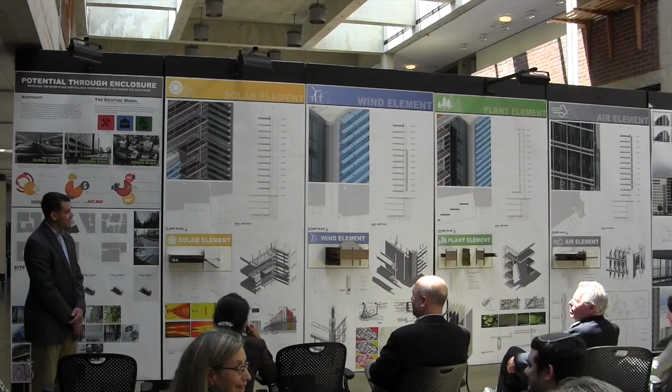My thesis focuses on the typical office building. The research question that I found myself asking was, how could I improve upon that model? And how could I take something that was working well and produce a better version of it for our urban environments? When I dove into this, I realized there were really 3 areas of opportunity.

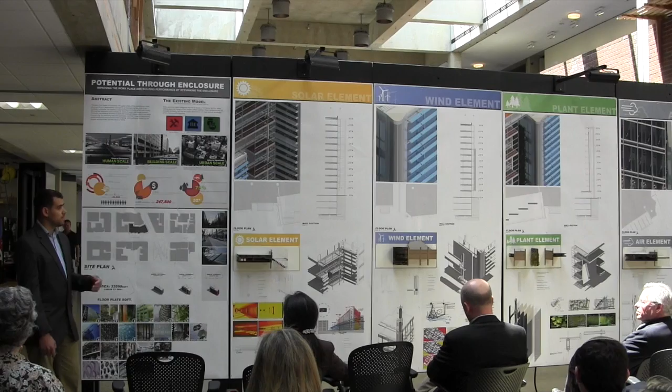There's an area of opportunity for improvement at the human scale, at the building scale, and at the urban scale. For the human scale, the aspect that came about was improving the work environment of the building. How do you create a better workplace using the enclosure of the building to do so? How do you focus in on that thin facade that you typically have now and turn it into a zone of something that becomes much more dynamic and beneficial to everybody inside the building?

It turns out that there are actually a few studies that cover the impact a healthy workplace can have on the employees of that space. John Burns, a medical doctor, put together a study and research article that helps facilities managers improve working conditions for typical office spaces. He found that a 15% drop in productivity could be attributed to whether the building was too hot or too cold, or the sun glare wasn't adequately controlled.

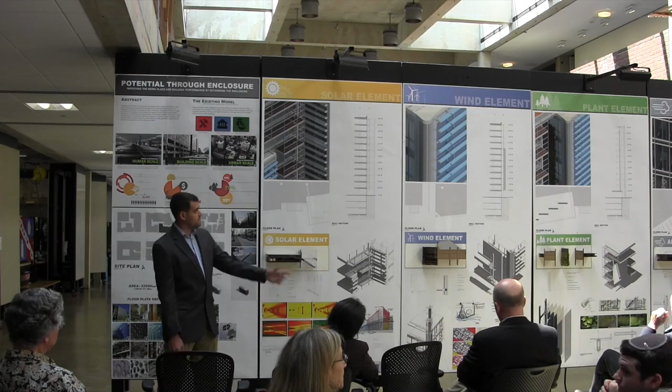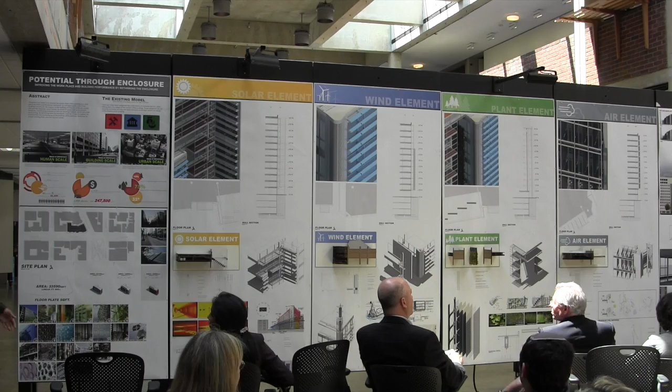How do you reduce the energy that the building uses? How do you produce energy with the building's enclosure? It's important to reduce the building's energy usage from a cost and environmental standpoint.

But leading into the urban scale, it's also important to think about how the building can become a better steward for the city. How do you take that and turn it into a production for the city? How do you put power back into the grid? How do you make it so the building is not just working for itself and improving that experience, but also improving the area and site around it through air filtration, water filtration, power generation, etc.

In studying these things, I approached 4 different elements or areas to focus my research and development on: a solar element dealing with controlling light and benefiting from the sun, a wind element which looked at capturing some of the wind currents along K Street, and a plant element and an air element that looked at reintroducing plant life, filtering storm runoff, and cleaning up the air quality and pollution in the city.

I picked an existing building. The site is K Street and Connecticut Avenue. The address is 1000 Connecticut Avenue. It's a pretty typical office building, 12 stories, for a law firm.

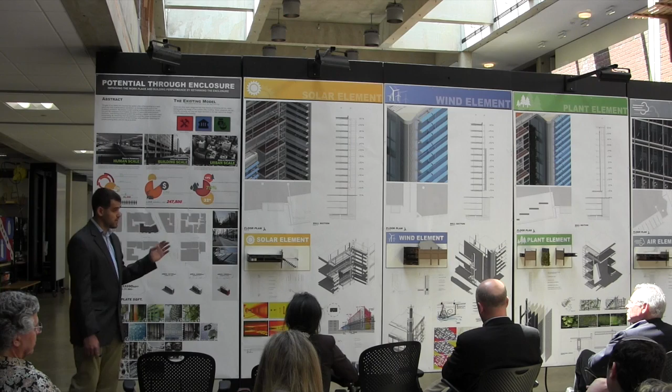It seems to be the perfect candidate for this test of renovating an existing building. I wanted to show that you could not just think about this in new construction, but really take the skin off of a building and start to look at it from there, retrofitting existing buildings, because that truly is, I believe, more sustainable than just building something new again.

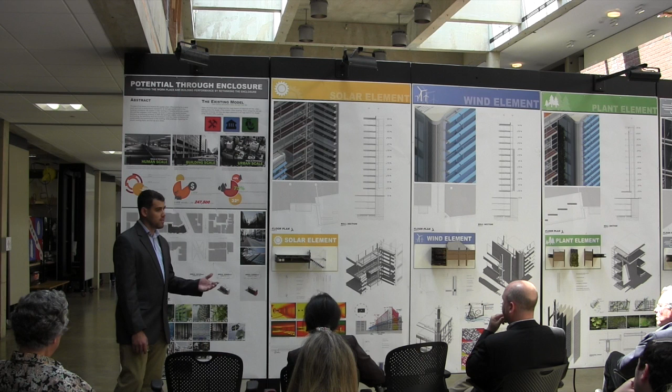I looked at what makes the building the way it is, the different factors, whether it's economics, developer, or city regulations. I also looked at a series of facades that did things like living walls and filtration systems. A lot of them did one particular aspect very well. They had a living element that was a showpiece, or they mitigated sunlight through automated systems and blocked the sun very well. But what a lot of these facades lacked was they didn't give anything back.

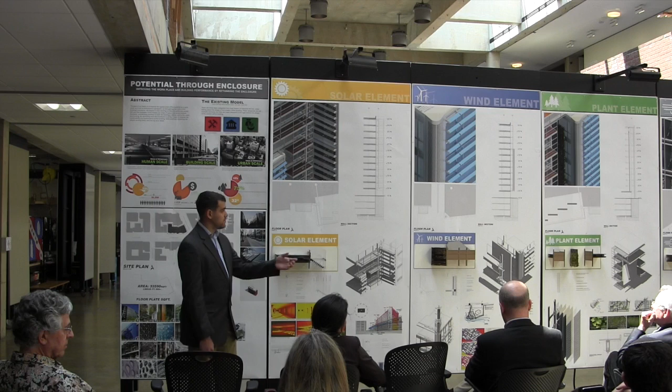So I'm hoping today to show you how it can be both ways, a relationship of protection for the occupants inside and giving back to the city. Again, there's the existing building on the site, a photograph of it now.

Here are some of the site images. You can see that I'm starting with this building and effectively renovating the exterior skin, the enclosure, so to speak. I start to make cuts and intrusions in the building to add this new material, and I've cut out some places to allow more light to penetrate and to insert these vertical living elements, which I'll go into detail on in a second. Here's a shot of those systems coming together, and then the final product.

You can see from the elevation these four categories or elements—I'll probably beat this to death, but basically we're looking at solar, wind, plant, and air. For solar, it became about how to shelter the occupants better from the southern glare of the building, which was a particularly harsh condition.

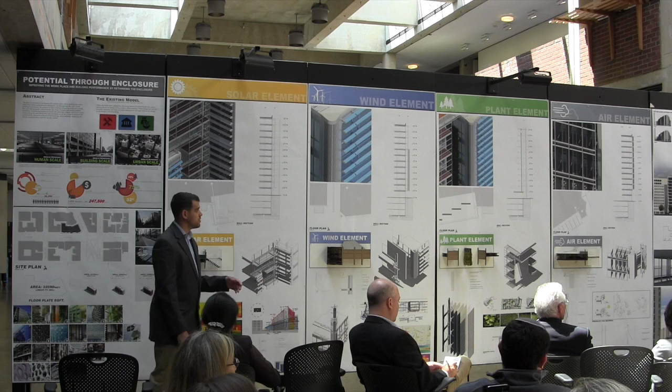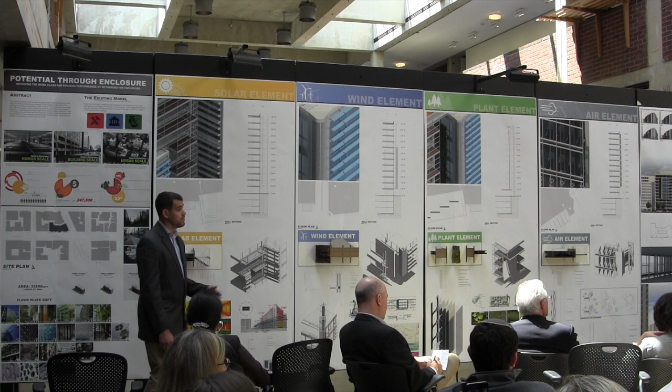I used programs like Vasari and Ecotect to study this and optimize the louvers to a point. But it also became about how to get natural light deeper into the slab. Because of the rigid floor-to-floor heights we experience in DC with concrete construction, I looked at systems like fiber optics, which help bounce light deeper into the building and can be used in smaller applications, such as schools and single-story buildings.

I looked at the louver systems in more depth—these are a fully automated system controlled by the building, but also by users in the space. Community spaces, conference rooms, and other breakout areas have louvers that give control back to employees, so they can choose to shut out more light or let more in based on their feeling. But it's also driven by the building, so at the end of the day these reset and perform based on the location of the sun.

I actually went through and designed some of the details for how these louver motors work and how the two different gear interchanges work.

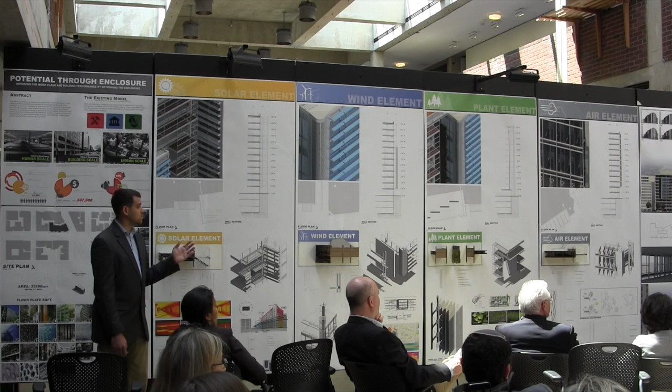Here are some of the site studies—existing conditions on the left, winter conditions on the lower part, and improvements on the right. As you go throughout the day, particularly in winter, these conditions are almost intolerable. Yellow is bad, greens and blues are good, and you can see how that transitions through the day. Eventually, through tweaking these programs, I was able to make an improvement for a more even, diffuse flow of light. If I had more time, I'd probably be able to make an even larger impact.

You can see from this section the fiber optic system I was talking about, with that light-catch element right there, which in detail looks like this. These mount to the exterior of the building and allow light to flow back deep into the slab.

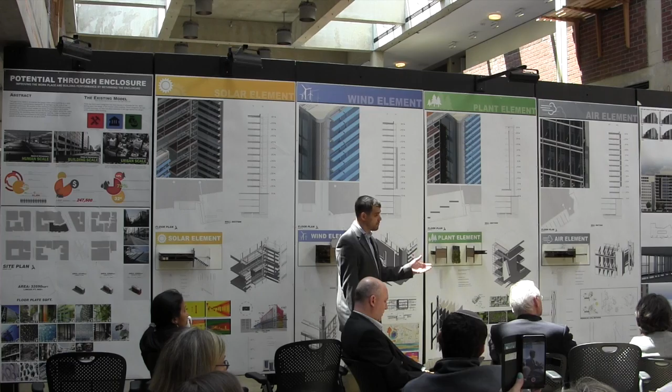This is a hybrid system worked in with artificial LED lighting, so that when the day is not as bright or the ambient light is lower, the LEDs step up and keep a consistent, even lumen count for the entire workspace. But on really sunny days, we're using less lighting and less power, which is better for the building from a performance standpoint, and the natural light is all around nicer for working.

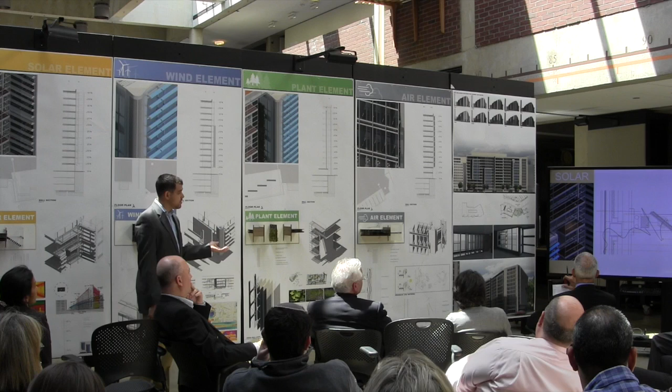Here's a detail of how that sort of system breaks down. Although the louvers are fixed, they do have a slight rotational mechanism that allows them to track winter and summer sun paths to gain the optimum efficiency, the average being 38 degrees for the DC area.

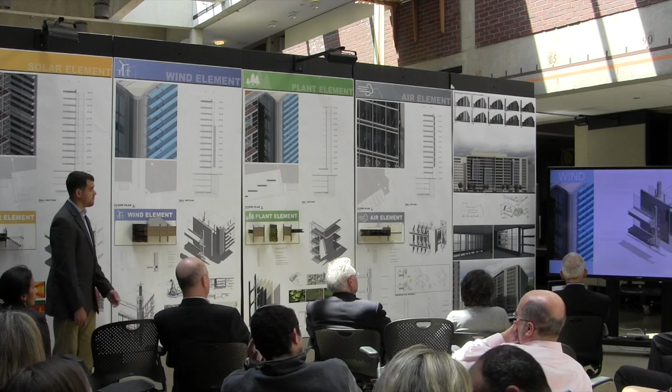Moving on to wind, you have the vertical turbine elements, which I developed to take advantage of those currents that bucket along K Street. You can see some of the initial urban and close-up wind tunnel studies I used to look at the existing conditions there.

While this is not a huge generator of power, it does capture some unrealized potential along the facade. There's an axonometric breakdown of how the system works: basically long shafts protected by this vent system, and these shafts are tapped into an alternator-like generator that allows for production of power.

So from the plant element, not as complicated as some of the others, admittedly, but it does bring life into the workplace. Plants, for example, have proven to help regulate air quality in work environments. They keep the air at a nicer humidity so it doesn't dry out, and they also help increase productivity according to John Burr's survey and study.

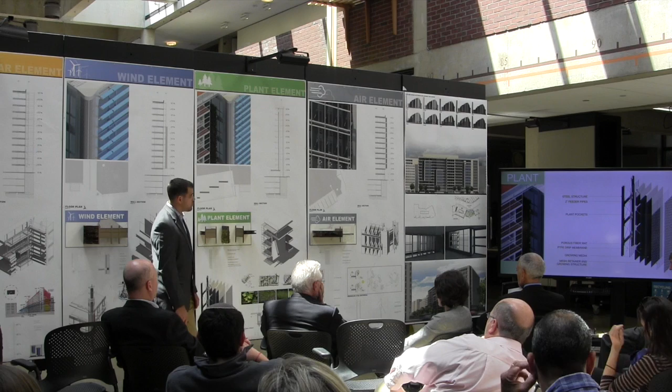The systems are not just for looks, however; they also filter stormwater runoff from the building. They use a specific set of plants, in this case English ivy and several other grasses, that pull all the organic compounds out of the rainwater as it filters down and feeds the system as it drips.

The idea is that once the leftover excess water permeates the bottom of the living wall, or vertical bioswale, it then goes back into the city's sewers cleaner than when it started as the acidic rain and polluted water coming down from the sky.

These are held in with a basic structural system with trusses that then tie back into the existing column structure of the building. Again, I was trying to present a realistic scenario that was a renovation that was doable versus something that was over the top.

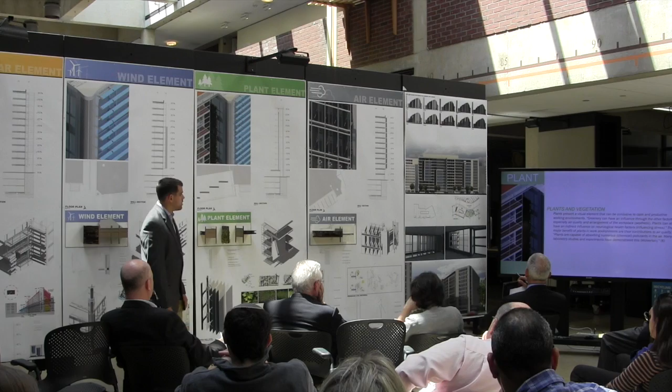So moving on to the last category, we have air, and this is one that I particularly enjoy. For me, air was more about regulating the quality and type of space, so I'm using ProSolve 370E, which is basically a titanium dioxide-heavy, nanoparticle coating that pulls smog and other pollutants out of the air via a catalytic reaction with the sun.

So you can see there what the system overall looks like, and then when we zoom in, you'll see that the shading devices have these thousands of perforations, and that's to help increase the surface area so the coating has the maximum amount of area that can work.

And then there's some of this data. This was developed by two students in Germany, an architectural firm, and they put it to use in a hospital in Mexico City in this format, and that's why I'm showing you those particular panel pieces. I wouldn't necessarily use their particular abstract form, but the material coating itself is still applicable to this project.

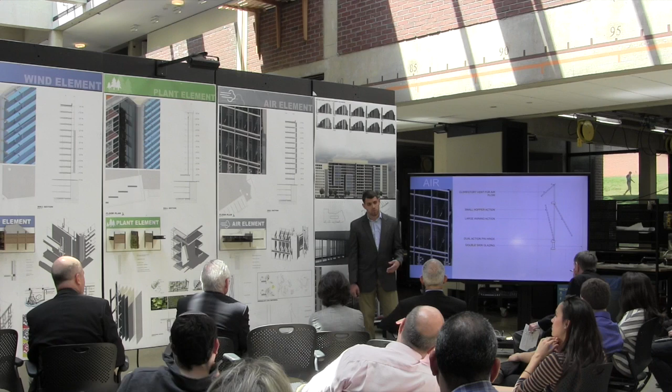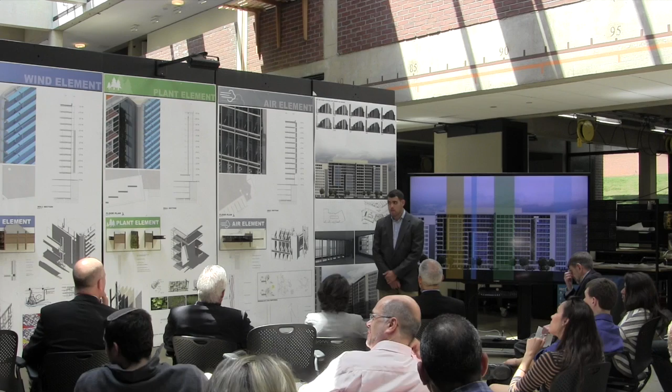Yes, I do think there's potential, and I actually did a number of studies that show the various areas for different placement options.

So I looked at where the wind flows were, and where the sunlight hit the most. You can see in the shadow studies that in winter and summer the top portion of the southern facade receives a lot more energy year-round, and the northeast surprisingly receives a lot of winter light that I hadn't anticipated before. Using those diagrams, I started to think about what drove that placement.

As far as combining them, I thought about how to integrate the systems overall with the skin, but not necessarily taking it to the next step. I suppose you could apply the coating, for example, to the louver systems that are forming this sort of double skin on the building, to help reduce some issues.

How did you assess that they would in fact contribute to the grid, rather than just meeting their own goals? I think your premise at the beginning was that they should be able to contribute back, give more energy, have excess energy savings that come through.

While I didn't break down the solar studies to the photovoltaic studies to that sort of energy output benefit, it was my assumption that at peak hours the building would be able to put some power back into the grid, and that during off-peak hours the city would provide. So it's sort of a give and take.

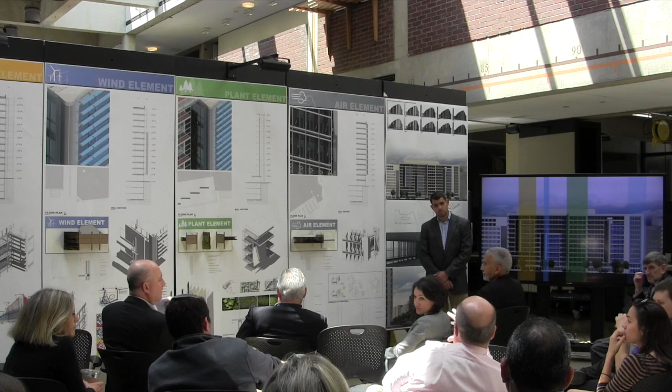I think this is a very interesting way to structure a thesis, particularly stepping into a building that already exists and thinking about the project of reskinning. I hope it shakes people up back there, thinking about this being a little different from what we usually see as a thesis, and I think it's good in its difference.

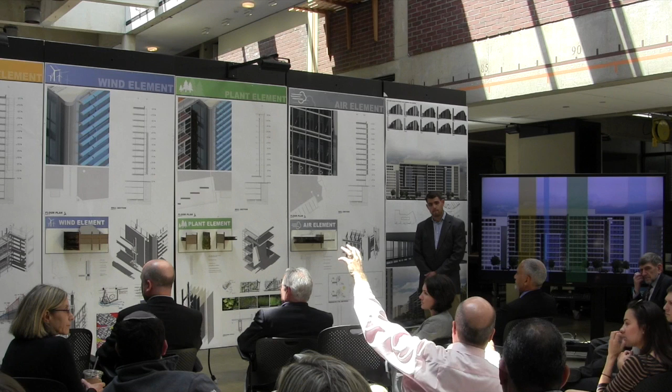At the beginning you talked about the human scale, the building scale, and the urban scale. Maybe I just got lost at one point, but it seems that most of these propositions are about the building scale. I'm left wondering, what is the contribution at the human scale, and what is the contribution at the urban scale? You may have said those are important things, and I'm just going to put them aside and look at the building scale, because my hearing isn't totally fantastic.

Well, the contribution at the human scale is the better work environment, a healthier workplace, with better lighting conditions, control over shading and natural ventilation. I can see that as being the implication of this, yeah.

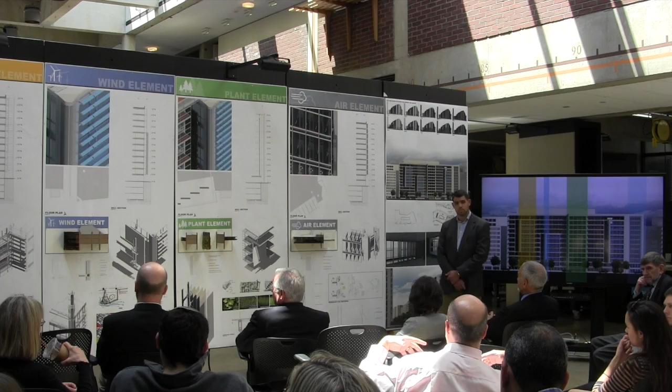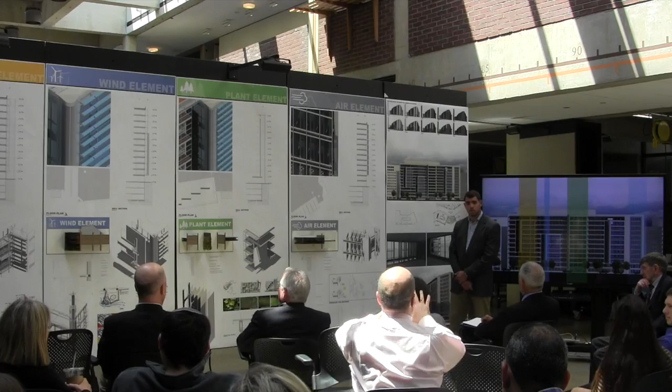But what I'm looking for is kind of proof of the pudding, the interior views that are the gestalt of all of this. While there are a couple of interior views there, they're cropped, and those are really about the skin. Those views aren't really about the changes to the work environment that come through.

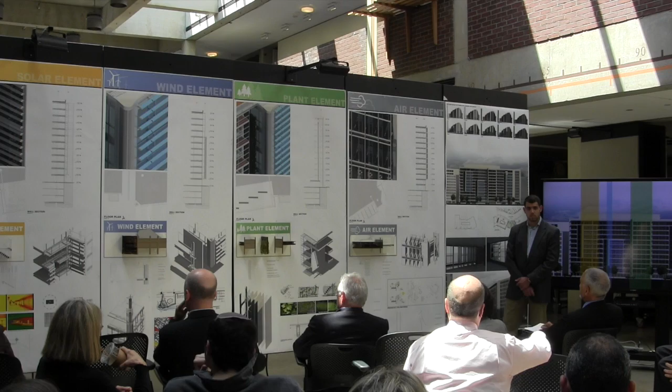It seems to me you've done a very nice, analytical study about moments that take place on the vertical surface of the building. This building was recently built and has a fairly boring skin to it, and that's what I'd say—it's a much more animated skin that you've created. That's probably much to your success in it.

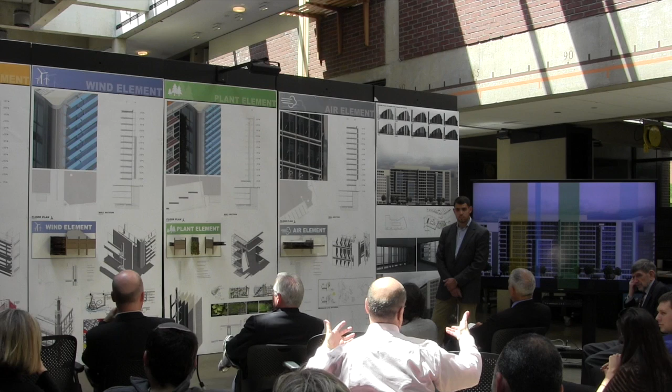But I have less of a sense, either urbanistically, as to what the value added is there. And I have less of a sense—I would think there'd be a more robust depiction of the quality of light, of the kind of space that's inside here. Something akin to the image you showed of the NPR offices.

From an urban standpoint, the implication is that by taking this building and applying this sort of design approach to an urban scale, you can improve the quality of the city's air and water and other aspects on a massive scale, starting with one small single building block. But at the same time, looking at...

Could I improve the immediate surrounding environment using these coatings or the way I filtered the water? So from an urban standpoint, it's about taking that building and not just stopping at, okay, the building does a really good job of regulating its own energy usage.

Now what can I do to help produce a better quality environment for the city around it? And that's sort of the urban idea from this.

The other one is I'm still trying to understand the wind. How many days in DC do we have wind which we can potentially use? And how far will the wind spread? Or is it just that we're talking about more comfort inside, or are you talking about using this wind inside the mechanical system?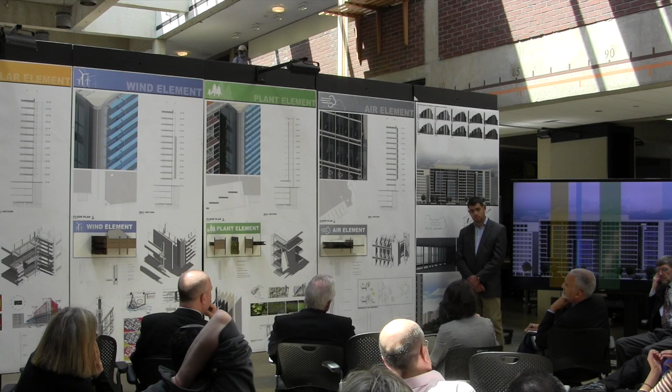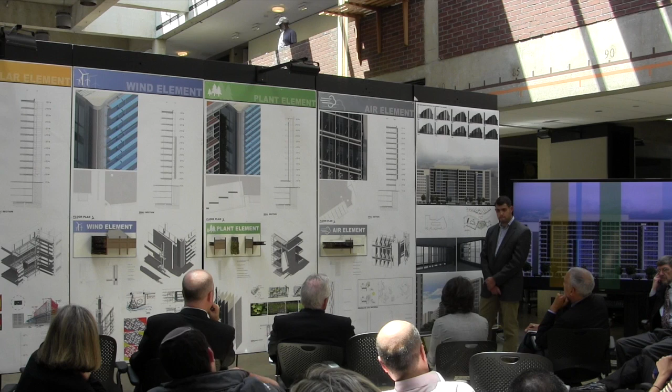But the other approach would be to say, here I'm being really opportunistic about the entire city—maybe not even just one building—about how the objects of the city, or the infrastructure of the city, or buildings under construction, might be the perfect opportunity to make an insertion. I think in that sense it might take some of your ideas and tie them to a particular standard of construction that, in DC in particular, is governed by a lot of influences that give it a kind of grain you can count on, like the floor-to-ceiling height and concrete. But maybe there are other things, like light bulbs, posts, or other infrastructures of the city you can think about.

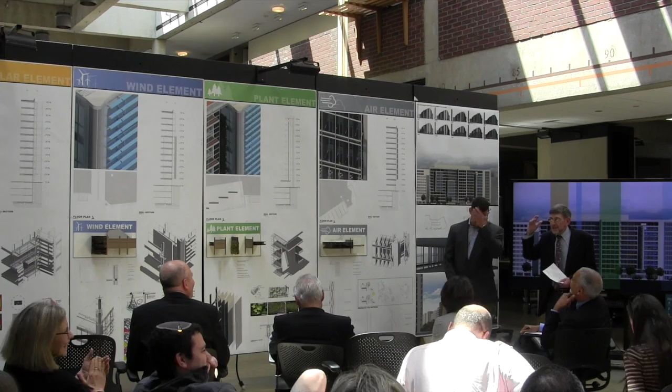This is, to me, a very... wait, hold on, Richard, come on. This guy is... so as a kid and as a parent, I was a reader of Winnie the Pooh, right? This is the Tigger. This guy's energy level and his willingness to tackle the biggest problem is just absolutely astounding.

So the reason I thought of this is because he's been doing what you're talking about. In other words, he started this thing with this outrageous statement: we've got this city, all these facades are boring as hell. What were these people doing? They all look the same, et cetera, et cetera. They're not doing anything positive. And meanwhile, there's all these guys running around ripping all the old facades off and putting new facades up, and it's not really making any significant difference—and I can do better. We can do better. This is where he started, right?

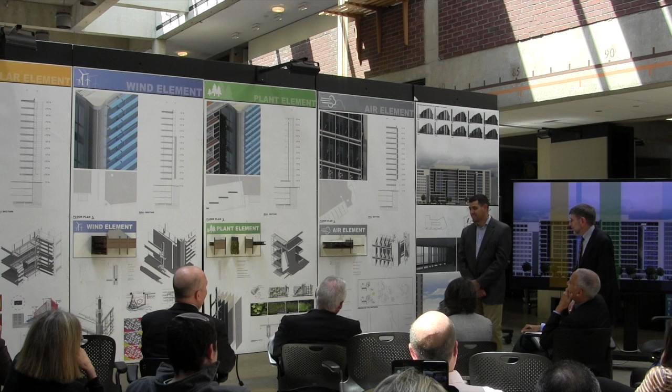Okay, come on. So all he's doing—this is just one example of what could happen in the whole city—was his idea, right, that he's not telling you about, because apparently we beat him up so much that he's being too... just the imagery, polite and whatever. So, come on, Richard. Richard. You're bouncing up and down.

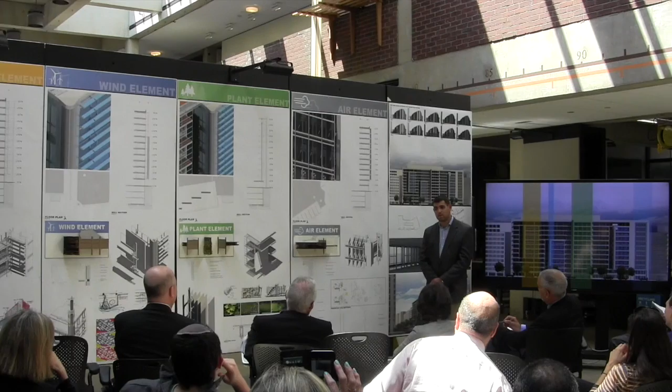I saw this project as a way to open the doors to a discussion about making an area that has a lot of potential live up to that potential. How do you take something that you keep pushing with this thin flat facade and make it something that actually earns its keep in the built environment?

We love to talk about sustainability from the standpoint of putting these lovely green roofs on buildings, whether they're intensive or extensive. We talk about how many gallons of stormwater we can collect in those, but what's stopping us from then applying that to the vertical surfaces of these buildings—particularly an office building, where I know there are a lot of very nice office buildings out there designed for clients specifically, with very large budgets, so they get the nicest finishes.

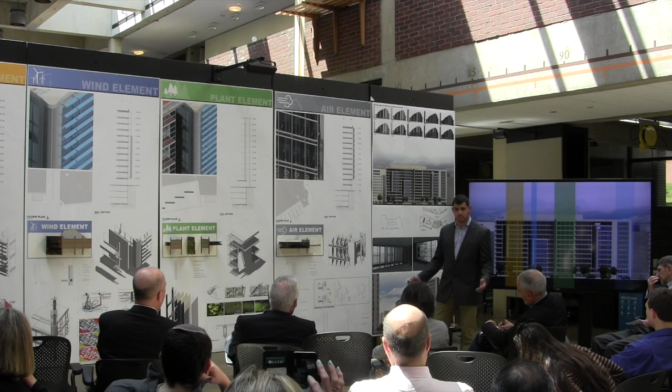But even those nice buildings don't have any sort of give-back to the urban environment that they're in. So that was the whole point from an urban perspective—how do you start that discussion about creating these buildings that actually put some stuff back in.

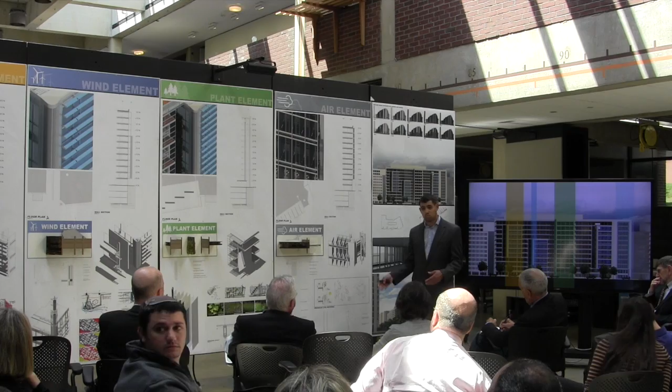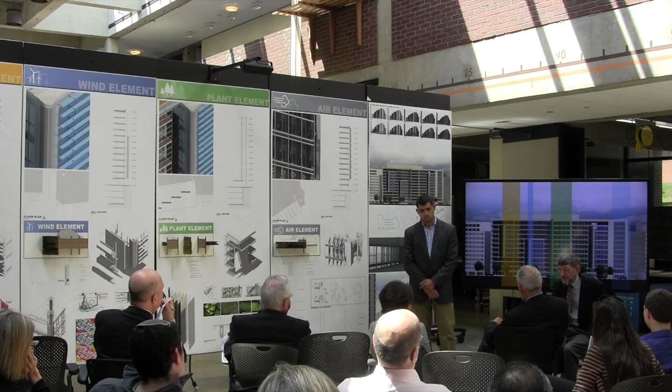Even if it doesn't work perfectly, I'm not saying I have all the solutions or that I've solved net zero buildings. But by doing this, we're doing a lot more for the city and the building than just putting up this year's most efficient glass panels. Washington DC, with its 10-story building height, is a pretty perfect place to do this because there are predictable wind patterns that won't change if someone builds a 30-story building nearby. So DC is a more stable environment to do this than Baltimore.

Friendly amendment on the windmill thing—take that cover off and show the vertical axis windmills there so people can see them spinning around in the wind.

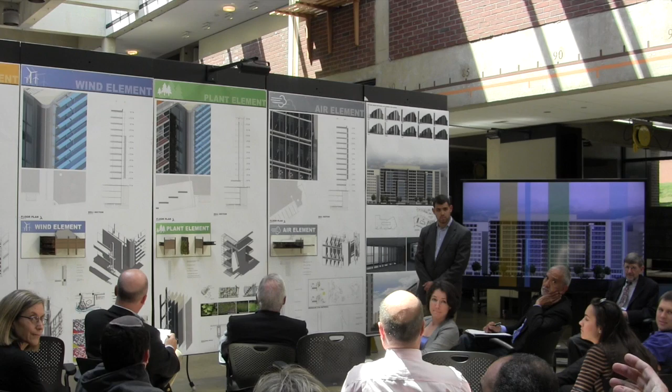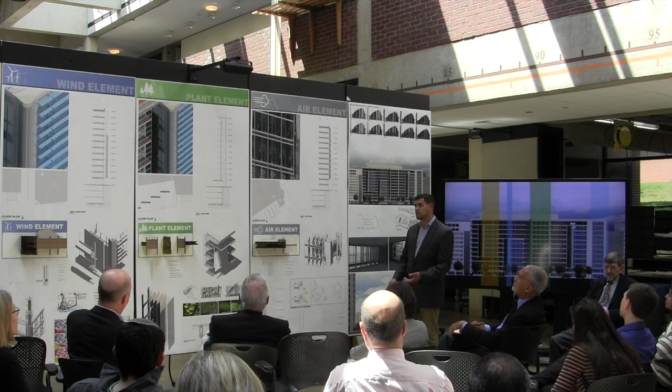Part of this is that it's not meant to just be a demonstration model showing something spinning on the roof making energy. I questioned that too, and the answer was that it's more efficient to have it contained so debris doesn't get on the blades. We designed the system to work on this vertical surface because of the height requirements we talked about.

I'm not saying I have all the answers, but I'd like to think that if we invested in this model a bit more than the economics-based model—where it's about maxing out rentable area to charge tenants as much as possible—if you're willing to sacrifice a few hundred square feet, even in this case I was able to increase the linear footage of the perimeter wall, which increases the value somewhat. Using this as a selling point for renters while also improving the space internally and externally was really what I was arguing—that we shouldn't be using these glass facades.

Richard, based on the enthusiasm, and I agree with you in terms of the ideology of it all, I'm with you. I don't think anybody in this room is here to say no to you about that. So I guess the question is, you make a claim that the building is better as a facade.

I walk past this twice a month going to my allergist this time of year. I'm looking at something that would certainly capture my attention far more than what's there now. So the thing I want to know is—is there a way to show imagery like a before and after, showing this building all bulked up and contributing to the urban streetscape? Is there a possibility of having some measure, let's say of the wind turbine, going back to how many days a year it can be productive, or even just the productivity on a good day? What's the ballpark estimate?

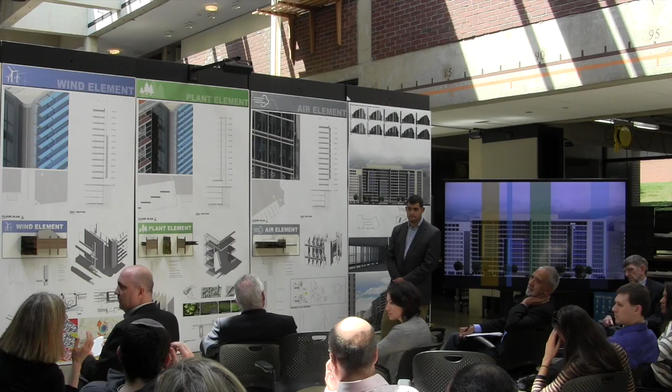I'd like to point out one of what I think are the triumphs of this: you've studied and picked out the actual material and assembly implications of your sustainable strategies, and you've taken the physical reality of a DC office building in a fairly generic sense. This could apply to so many buildings, and you've really looked at what it means in terms of what the parts are, how the parts join to the building. I think you've taken this project farther than we often see in a thesis, and that's an important aspect of what you're doing.

So, yes, you haven't quantified it all for us, but you have used the software to run some tests, and I think this is an exemplary project in the variety of ways you have dug in and tackled these sustainability strategies.

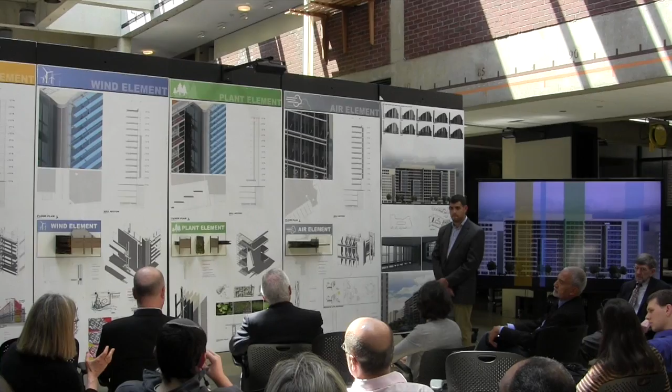So I think you've really gone beyond greenwashing here, and then you've looked at, okay, what are the real implications? How's it going to change the office building—not just in terms of renderings. Yes, you could have shown us the inside, you could have shown it from the kind of street level view of the city, and I know you wanted to get there because you had enormous ideas.

But I think it's important to point out that what you really have done well is you've taken us right into that facade. You're not just looking at it as a wall, but including your drawings, you delighted in the pieces and how they come together and make these dynamic aspects really functional. That's something else you could have shown us that would be interesting—rather than a static, thin facade, you've given us one that's responsive, that actually operates.

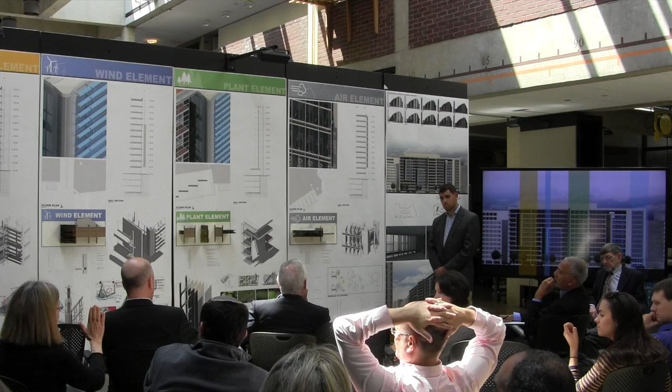And you've also, I think, underplayed the way in which you've proposed an architecture in which you can't build the same facade on every side of the building, that you would produce an urban area in which we felt oriented in the environment because of the way each facade worked in tune with the sun, the wind. We would see which sides plant life could grow on, which sides it couldn't, where it's possible to generate wind. We would become, I think, more aware of the environment because of this type of architecture that you've explored for us.

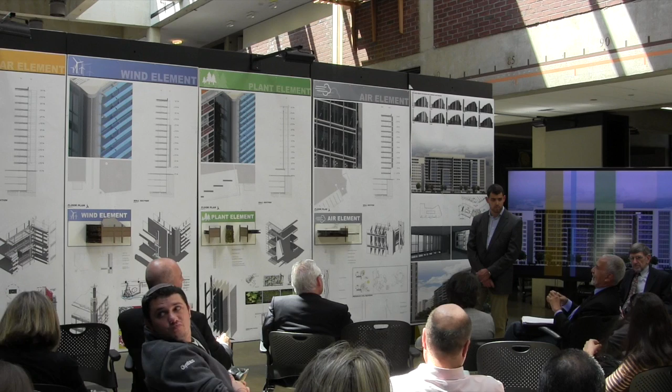...almost suggests that these systems might have been a better test on a building where you controlled the orientation and placement, and had to respond to other conditions. You're lucky, this has a southern exposure, so you've set the parameters under which you would explore, but some buildings have other exposures as well, and they'd have different solutions.

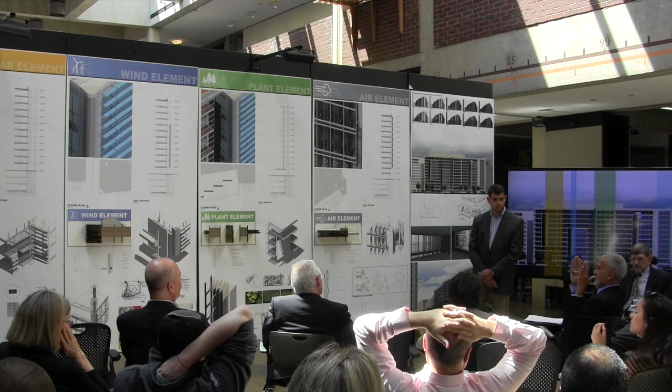The interesting thing about the building in Baltimore is that it uses double glazed walls, sometimes a foot and a half apart between the two planes, and then other things to respond to the orientation. I'd suggest a test could be done in a number of ways. The fact that you limited the test by taking an existing building causes us to look at it a certain way, versus if you had a building and your solutions responded to all of the building's conditions, including its roof.

So if we elaborate on the strategy, at one level what he's got here is a process applicable across the city of Washington, D.C. One can imagine - he did detailed wind studies of what happens on the street. If I remember correctly, had he been doing the building on the opposite side of the street, the wind velocities wouldn't have been great enough to drive this turbine.

Right, so in that sense it's place specific. But what that also means is that if you do the wind tunnel study for the entire office district of Washington, D.C., then you know where the wind velocities are strong enough to drive these turbines, and it tells you where you might go about encouraging people to do the kind of thing Antonio was mentioning - you figure out what the incentive system is.

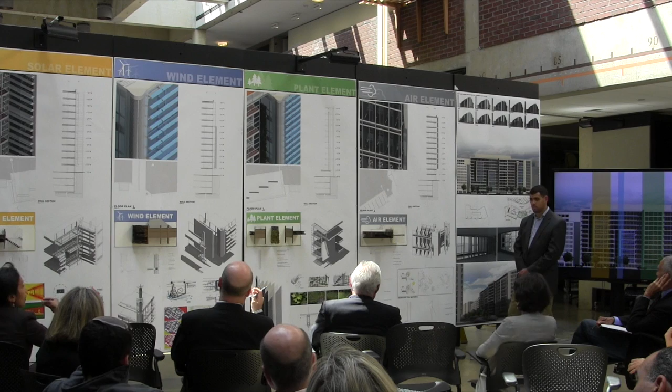Something to quantify your research rather than just pictures - this will help you get the sun's depth, 12 feet. And if I have a conference room there and I don't need 12 feet of sun on my face, I know I can't do that. So any little thing to add more value to that room, the time you spend, so that you can make an informed decision for your business.

So moving forward, maybe take a few minutes and write notes for yourself, because as you get into the career, you can use this information.

I think Antonio touched on a point that might suggest where the future of your thesis might go. Right now, Exelon Corporation, which has bought all of Baltimore Gas and Electric, is now trying to buy all of your Pepco stuff. They're building a new headquarters building in Baltimore with a skin that does nothing. When they came before our design review committee, we challenged them: why does their building have no response to energy issues if they're an energy company?

I don't think it's the developer or the city who would give this benefit. I think it's the energy company that should be buying the energy that's being saved here. The energy companies would be the partner in the skin, looking at the potential of the skin, how you deal with it, how you finance it, and how you gain from it, because nobody's going to invest in it unless they gain something.

Absolutely. But Gary, I'd like to say I think it's the owner of the building, I think it's the energy company, and I think it's the city, in partnership.

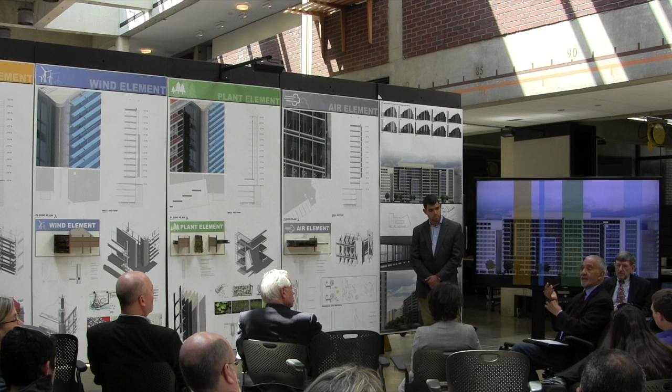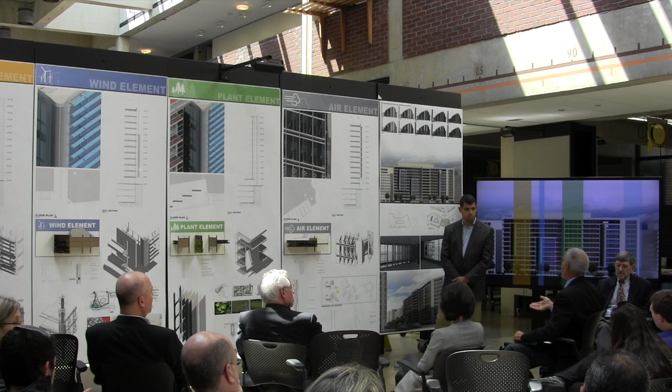It gets back to the question raised earlier about how many different levels you look at this urbanistically, as a pedestrian walking along the bottom of the building with things dripping on your head from overhead. So what do you do in the design of this to create a full building and not just a building skin? I think some of us cringe at just reskinning a building rather than rethinking it on all of its levels.

I think you could have solved some of the scalar issues here by thinking about how the ground plane of the building works, what people see when they're walking down the sidewalk and so on. The window plane is generally about maybe 3 stories, and how is that scale different than what happens above that?

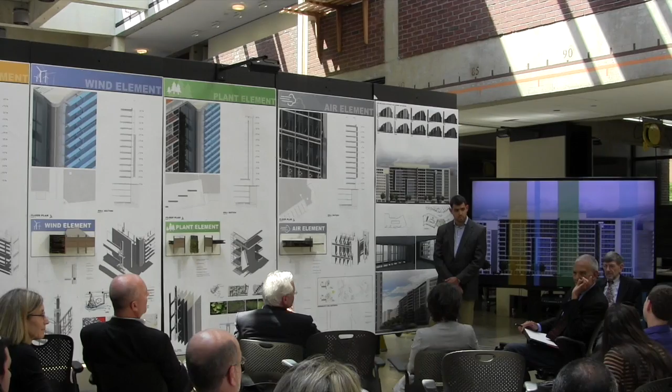That would have introduced a discussion about landscaping on the streets, a question about cover and shade, a question about how you differentiate the office from the retail below. And you have an opportunity by adding this skin to deal with the entire building and its environment, not just the skin. And maybe the answer is that there's a different skin at a lower level than at another.

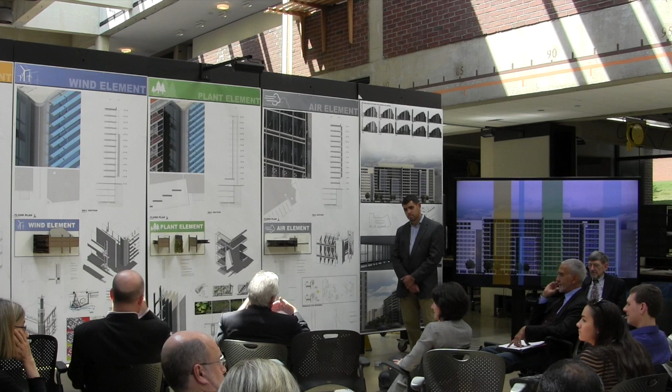If you can get the facade to work on a more regular basis, think about how you can introduce water and rain capture into this, how you can use the stack effect to capture that with a heat recovery wheel, and really think about this as a living facade. This gets back to process. I think thinking about these as individual things and not as a whole system is where I would encourage you to take the next step.

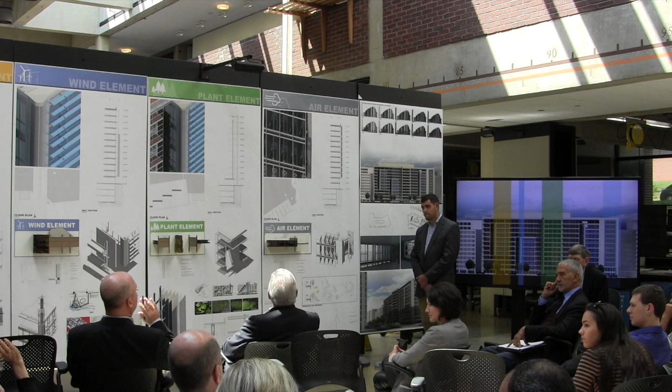There's another aspect that I'm going to go out on a limb about. I think that a lot of these things in the future, maybe not so much now, this is going to be dated. People are going to say, these people were doing this back in 2020, whatever. Why? It's the same thing as when airbags showed up in cars.

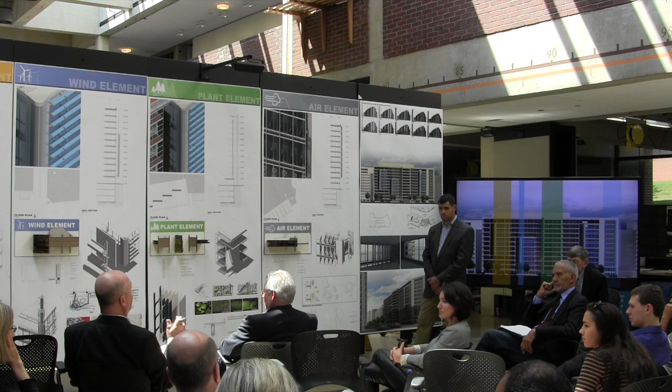The car companies would boast them, airbags. Now they're standard, and they're hiding them, but they're there, they're functioning, and thank God they're saving lives, right?

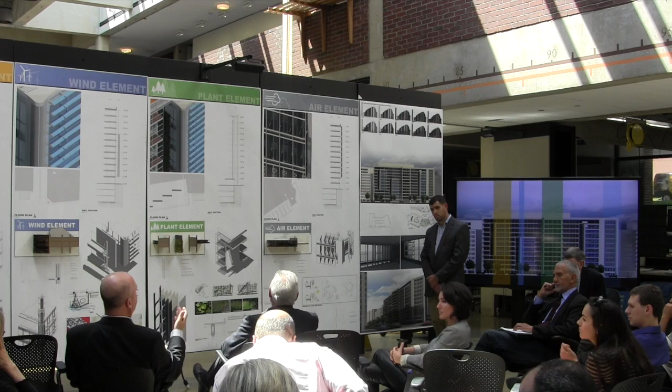I think the green features are more and more becoming code and more becoming part of daily life. And I think one thing that doesn't change is you're an architect. These things, to me, are means to an end, and I think eventually I want to see a building. If the facade is working, it's awesome. But do I really need to see things all the time? Do I really need to know it's there and it's green and it's leaking and it's doing it? No. I want to look at a building and think it's more sustainable, more financially interesting, and more attractive to many different owners.

We have biases from all kinds of things. You want to design a building that's fantastic, and these things are so flexible that they blend almost imperceptibly, and then it becomes timeless. Then the fad of the green stuff, which is beautiful, and at one point actually is something that works.

I was in Portugal not so long ago, visited the building that my brother bought an apartment in. The building had louvers similar to this, on a corner. And I couldn't figure out what those louvers were. I was like, what is this? He's like, you don't know what this is? So we walk inside, every unit had a corner where you could hang clothes. That was just to hide the hanging clothes, because the city doesn't want to see hanging clothes. And now there's an architectural solution to something that was terrible. And still people like to hang their clothes if they can and save energy because they're not using dryers. So there was a solution there.

And I think the same thing for the green stuff, perhaps, is something that could be explored in architecture.

Let me just defend you for a minute, because I don't think this is actually so different from what you're saying necessarily, but I think it's critical that we have people looking at this and trying to invent new, down to the system scale, new ways to build. And I think that's how it becomes integrated in a way that we don't think about it as so distinct anymore, by saying I need to design at a much finer grain of detail than just accepting what's available, because otherwise we're never going to solve these problems.

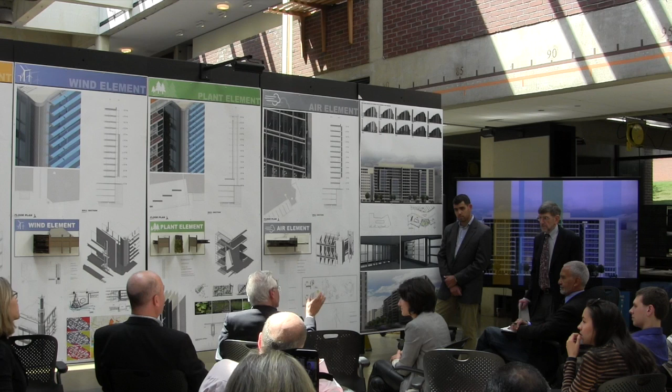But KieranTimberlake has designed a double wall system within the same depth of the standard curtain wall. So we know technically we can do that. So as we begin to think about walls, the questions need to be brought up in a sense. And picking up on what Jen was saying, we continually need to keep up with what's going on and push it to the next step.

You mentioned before three groups that you could see being involved in this process to make this kind of thing happen. One was the owner, one was the city, and one was the energy company.

I want to add the manufacturers of these various devices, whose interest is simply in selling them, and the sales folks that sell them, and the people whose livelihood is derived from installing all these things in complicated ways. And I think, if I remember this correctly, this gets to the personal driver. We saw earlier today personal drivers—Richard's worked on these buildings because his dad, if I remember this correctly, does a whole lot of this kind of work.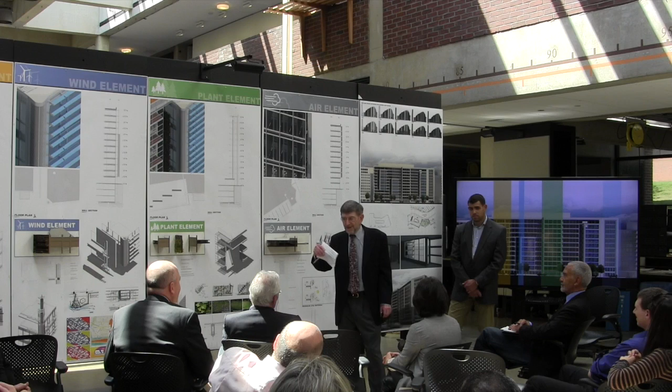He is, in fact, in the construction industry that reskins these buildings that Richard's had direct experience with. It's the combination then of that larger group of people understanding together, getting together and understanding that this is an opportunity that actually can happen.

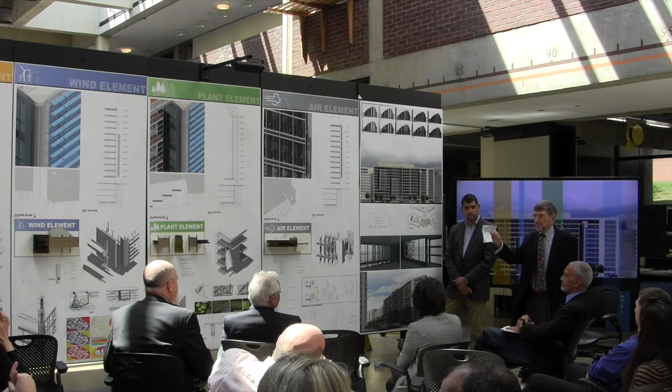With that, Mike Lambros was the chair of this committee. Madeline Simon was also on the committee. Closing comments? Matt, you have anything you'd like to add?

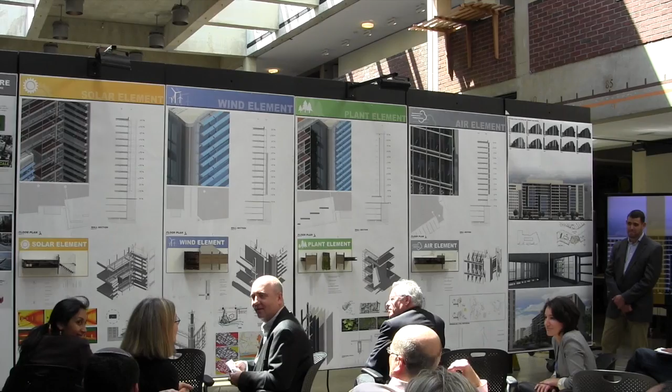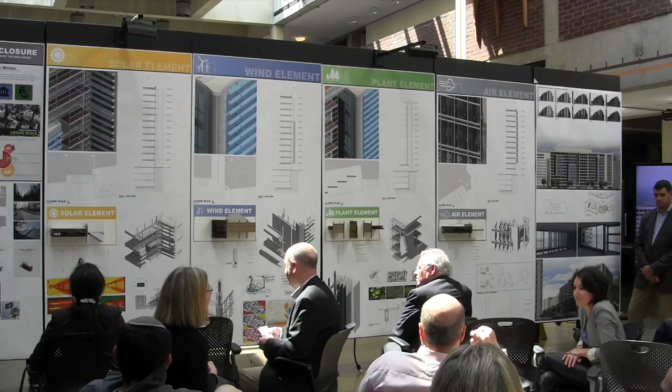I think I gave my comment earlier, but I could just add that I enjoyed this thesis so much because of my passion that I share with you for building skins. So thanks for giving me the chance to think about it this past year. This is just the beginning, hopefully.

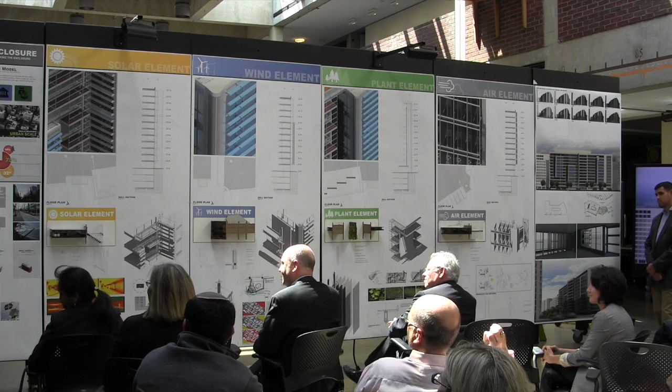Well, I think it provoked a great series of questions today. I think it's remarkable to have a young person about to embark on his career asking these kinds of questions. He's not making a fanciful piece of architecture that's just a folly of his imagination. He's trying to solve real problems. He's looking at the world as it could be, not the world as it is.

We think about all the people that could play a role in this. We can play a role in this because things like the airbag was mentioned as an example. That technology existed and there were guys out trying to sell that. There were salesmen going around the world trying to get some car manufacturer to put it in. It wasn't until they did the research, until a university student like Richard presented the research that said this saves lives, it has a measurable impact, right? And many, many things.

Windshield wipers at one point were an option on cars, right? So these things happen with days like this where we say the world could be different. And I think that's the most rewarding part of your journey here, Richard, is that you've always said the world could be different. How could it be different? You've looked at four ways it could be different.

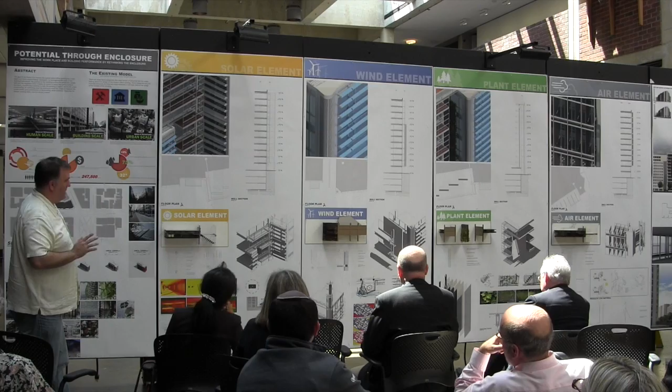I wish that maybe we brought him a little maybe strategically, because I know he does have the answer for how much deeper he's gotten the sun in here, both as a distance and a percentage and a lux value. We've got a cool color diagram to go with it. He did answer the question about wind, because I said, I walk there all the time, there's not enough wind there. He said, yes, there is enough wind there. And he first modeled the city, he modeled this.

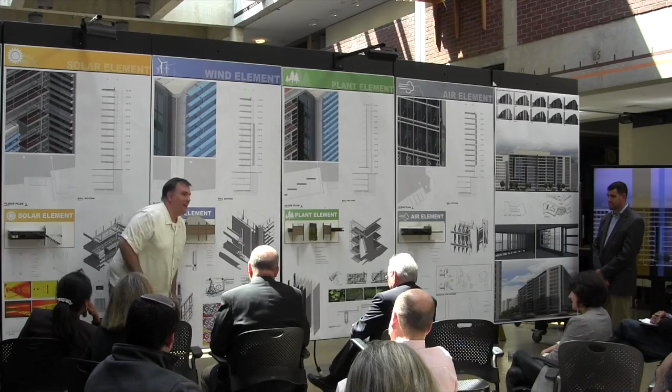I'm glad he brought it here today. I said, Richard, that's not the city. That's not what this is. This is an island of a piece of the city on a plate, and the wind doesn't move around it like that. And he came back and at least gave me the neighborhood. He didn't give me the whole city, but he's asked those questions.

And to all the students in the background here, this is how you set out a premise, have a research question. Can I move the needle on solar? Can I move the needle on ventilation? Can I move the needle on whatever the issue is? He's tested it. He has those numbers.

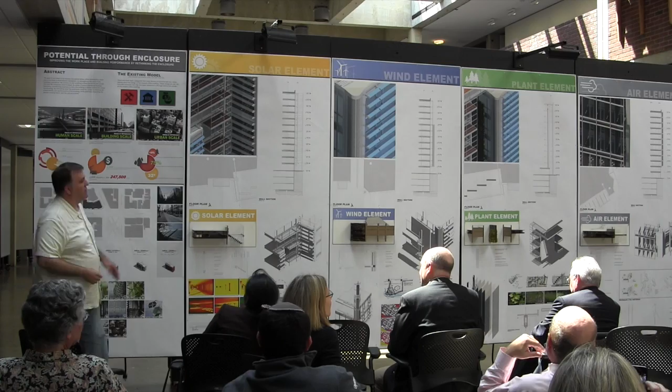He's looked at it. But I'm glad in some ways you took your licks today by them saying they wish they knew the numbers. We know you have the numbers. We know how many, one inch of rain on the square footage of this, how much runoff is going to feed those plants. We know how many gallons that is. You didn't think that was important. I didn't think that was important for you to know today.

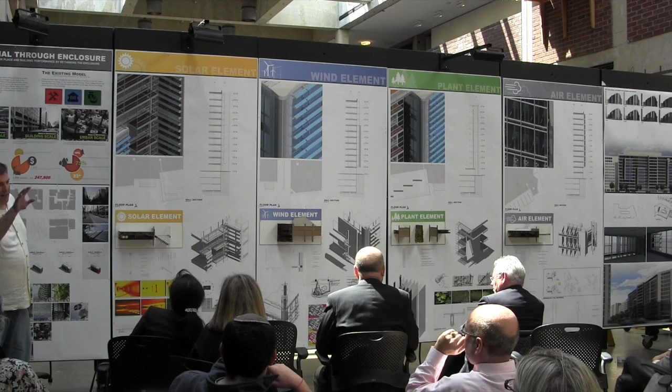287.53 gallons. There you go. That's not the important part, right?

The important part is that you said, can, again, architecture change the world to make it a better place? Can I come here and work my 60 to 80 hours a week, depending on where you work in the state, and have it be a better place? Can I look outside and see something green and growing that's living in this world with me? Can I do something that's going to move the needle on the world?

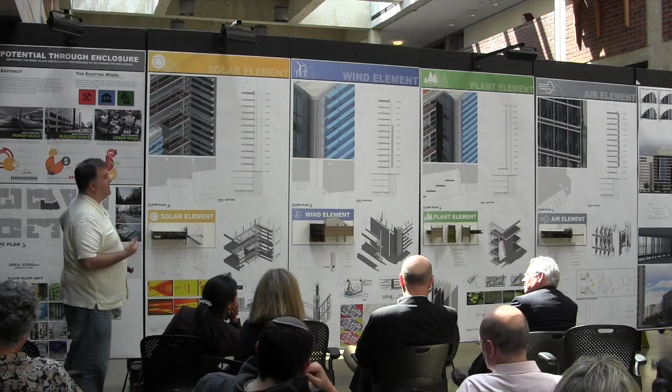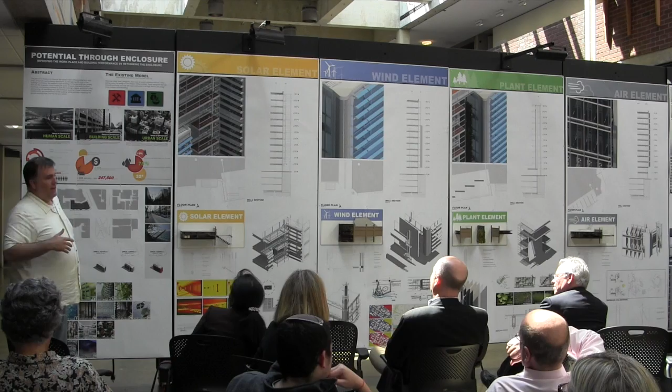And that's fantastic. And I think to all the students out there, this is how you set up a research question and how you say, can architecture fix X? And we're going to go look at another one. We're going to look at another. So thank you, Rick.